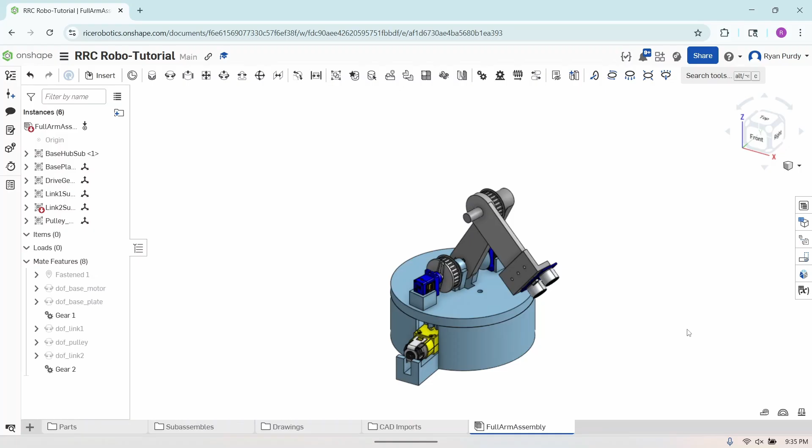In this video, we'll be taking our complete design, as shown here, making some minor adjustments so that it'll actually work better once you print out all the parts and you assemble it to actually build your robot. So, whenever we initially designed this arm, we were constrained by the torque that can be provided by this servo, right? Or not this servo, sorry, this servo over here.

So this servo has to put enough torque to support the weight of link 1, the weight of link 2, and the sensor at the end. So it turns out whenever I actually built this version of the arm, the links were too long and too heavy, and this servo can't handle it. So whenever it tries to lift the arm, it just falls back down.

And so we need to reduce the torque that we're requiring of this servo, and we're going to do that by making these links lighter and shorter. So we're going to start by making some small adjustments to both link 1 and link 2 to make the arm actually functional once you try to assemble it.

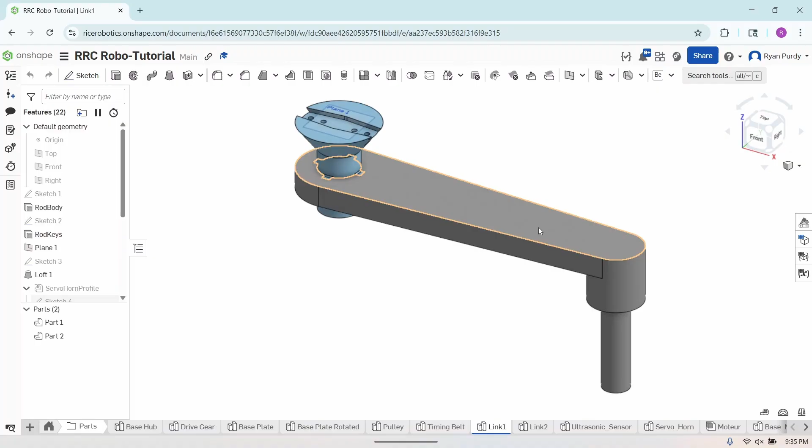So navigate to the link 1 part. And we need to open the sketch that's affiliated with the link 1 body. Hopefully you were naming your features and now we can find it easily. So we need to edit this sketch. Looks like this. So first thing we're going to do is make this shorter.

So we're going to change this dimension from 108.8 to 80. And then we're also going to change the diameter of this circle from 20 millimeters to 15 millimeters.

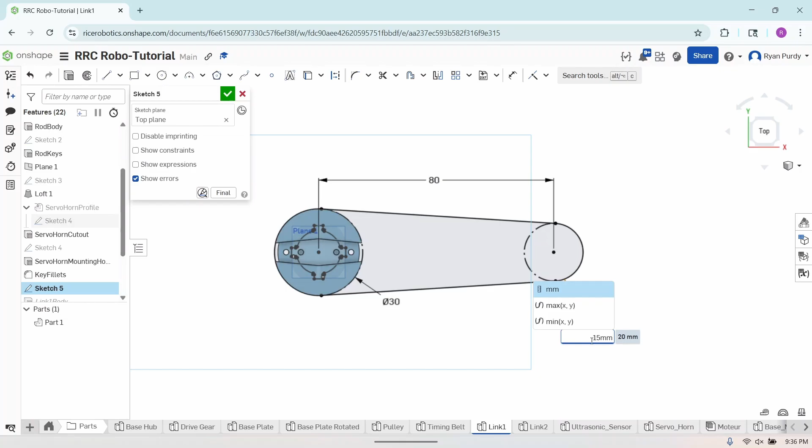So this already reduces both the weight and the length of this link quite a bit, but we can do even more by adding a cutout here, because this is a non-critical area, so we can just remove some material here and it'll further decrease that weight. So we're going to start by drawing a line here somewhere, okay?

Escape the line. Now we're going to use a relation to make this line parallel to this straight edge, okay? And then we're going to define a parallel distance between these two lines to be 6 millimeters. So we need a dimension of both lines. This distance is going to be 6 millimeters.

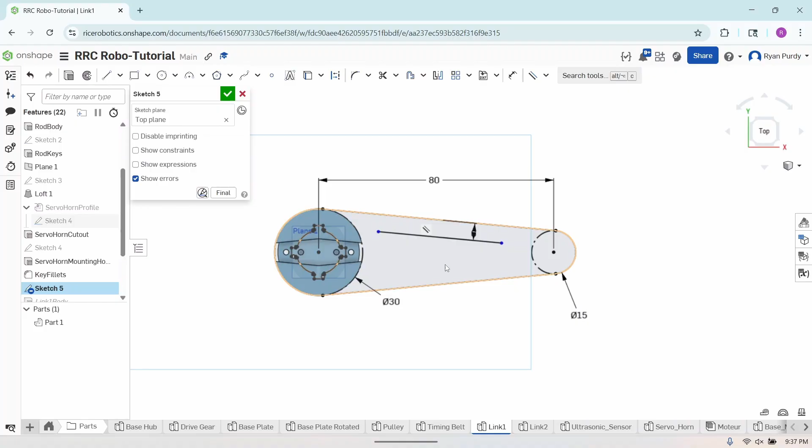Okay, now we want to mirror this onto the bottom half of the link. To do that, we need to find the plane that's dividing the link horizontally. It looks like it's the front plane. So choose the mirror tool. We're going to mirror about this line and mirror this diagonal line.

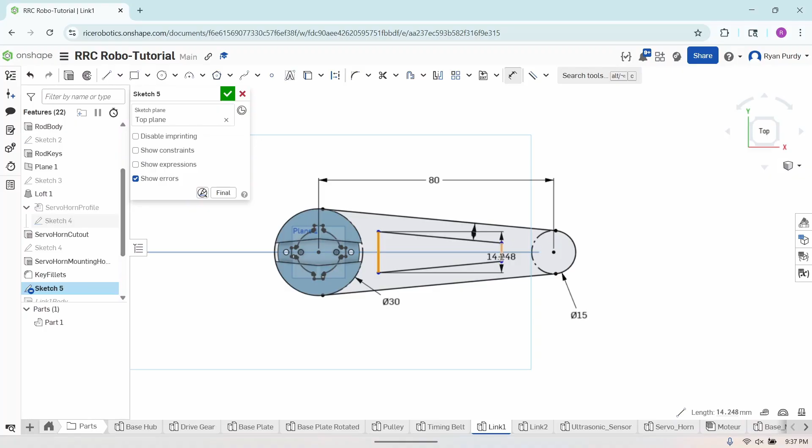Okay, and now I need to cap it at the ends. So we're going to add vertical lines that connect these two diagonal lines. Okay. Now we need 2 more dimensions to fully define this sketch. First, we're going to define a length for this cutout as 50 millimeters.

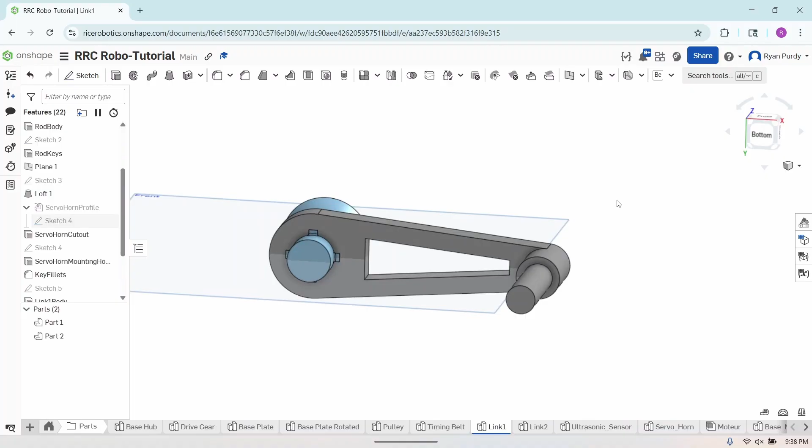And then we need a dimension to fully define its position. And that one is going to be an 18 millimeter dimension between this close edge and the origin here, okay? And with that dimension, the sketch is fully defined, and when we recalculate the model, we see that we have a shorter link that also has a cutout. This will significantly reduce the torque that we need from that servo.

So this is great. Bad news is it introduces a problem, right? So we've decreased the length of link 1. For one thing, it's probably going to mess up our assembly. Let's see if the assembly still works. Okay, the assembly is fine, but now that we've changed the length of link 1, the length of the belt that goes around these pulleys has also changed.

And that might not sound like a big deal, like, okay, let's just change the length of the belt. But remember that we changed the length of the belt by scaling down our current model. And if we scale down our current model, we have to scale these pulleys by the same factor. So this could be very annoying. So we need to find a way of fixing this issue that is not overly complicated.

So the way we're going to do it is we're going to use what's called a variable studio. And we're going to develop a method of automatically updating that belt and pulley size as we change the length of this link 1. Okay, so let me pull up a sketch that kind of demonstrates what I'm talking about.

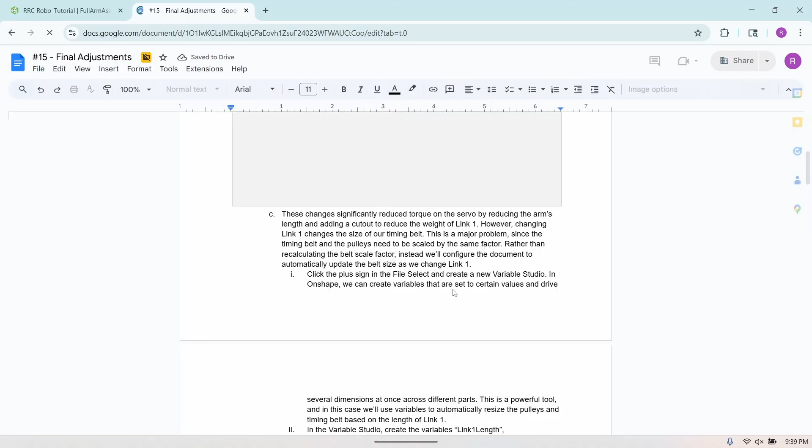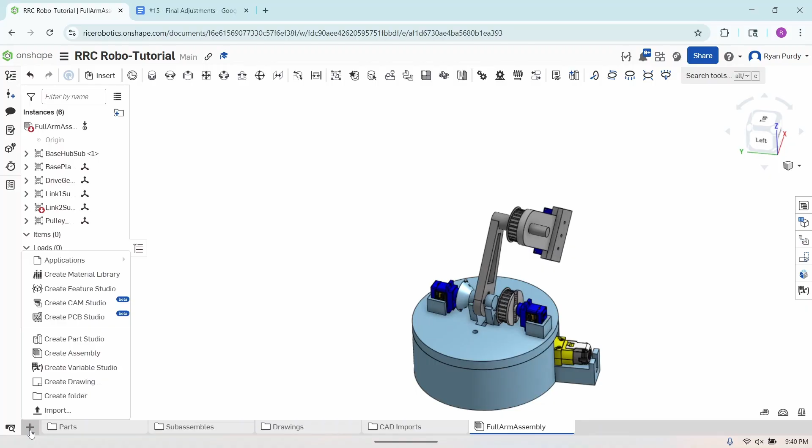So how do we actually implement this in Onshape? We're going to use what's called a variable studio. So outside of all of our folders, we're going to hit plus in the file select. We're going to create a variable studio. So in a variable studio, you can define any number of variables that you want, and we can use these variables inside of our parts to specify certain dimensions. So for example, you could use one variable to define 5 different lengths across all of your parts. If you change the variable in the variable studio, all 5 of those dimensions will update. So this is a very powerful tool, and we're going to use it in this case to automatically rescale our belts as we need to.

So to do this, we're going to define several different variables, 4 total. First, link 1 length, then starting belt length, starting pulley diameter, and then the scale factor that's going to be calculated from those other values. So these 3 will be the length values. The scale factor should be dimensionless, so we're just going to change it to any. Okay. Now link 1 length, we've defined it just now. It's 80 millimeters.

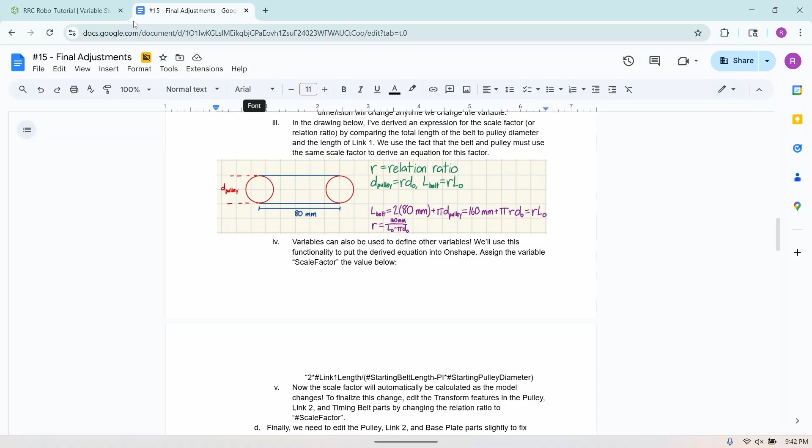Okay. And then from McMaster, when we imported the pulley and the timing belt files, we could get the initial length and the initial diameter for those. I just have those ready for you here. Initial length of the belt is 375 millimeters, and the initial diameter of the pulley is going to be 38.2 millimeters. Okay. Now we have all 3 of these quantities that we need. We're going to apply this formula and use that to calculate our scale factor. So you can use variables that you've already defined to define the value of other variables, which is pretty cool. So how it's going to work is 2 times, and whenever you're going to use a variable to define a dimension or define another variable, you always start with the hashtag, and then you type the variable name.

So we're going to do 2 times this link 1 length. So we're going to go 2 times hashtag link 1 length. And we're going to divide by the starting belt length minus pi, which I think you can get just with this. Yes, so it's already defined here, so just type pi in all caps, and it will work for you there, times hashtag starting pulley diameter. And now that should be our formula. Should have closed the parentheses, hit enter. Yes, this is the scale factor we need. So now we've calculated the appropriate scale factor, and now we just need to actually apply these variables to our models so that they automatically update as needed.

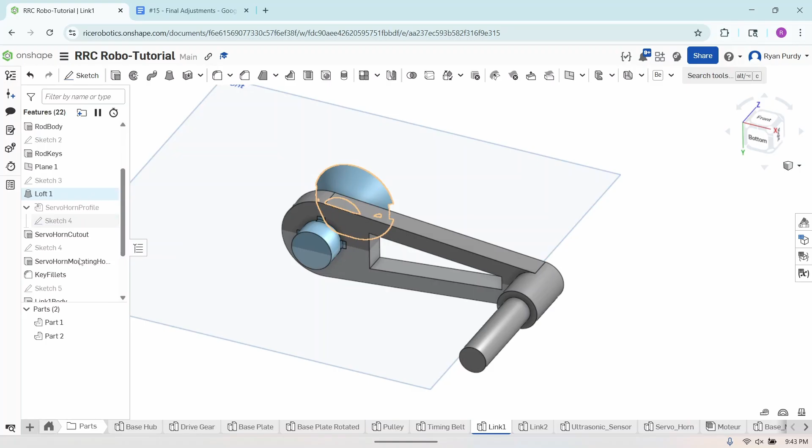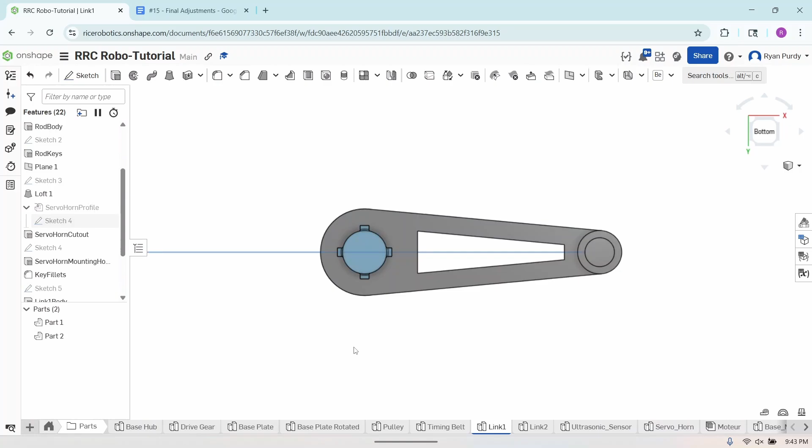So first, we're going to go to link 1. We're going to edit that link 1 body sketch. And this time, instead of typing this value, we want to reference a variable to define this dimension. So it's going to be hashtag link 1 length that we just defined. And it's still 80, but in this case, if we change that variable in the variable studio, it'll automatically update this model. Now we need to go to everywhere where we scale a pulley or a timing belt, okay?

So first in pulley, let's go to this transform feature and edit it. Instead of providing the scale factor directly, we're going to use a variable, hashtag scale factor. You'll see it gets smaller because we require a smaller pulley for our new design. You can see there's some issues with these holes. We'll be back to fix that in just a second. The timing belts, we're going to do the exact same thing with the transform feature here.

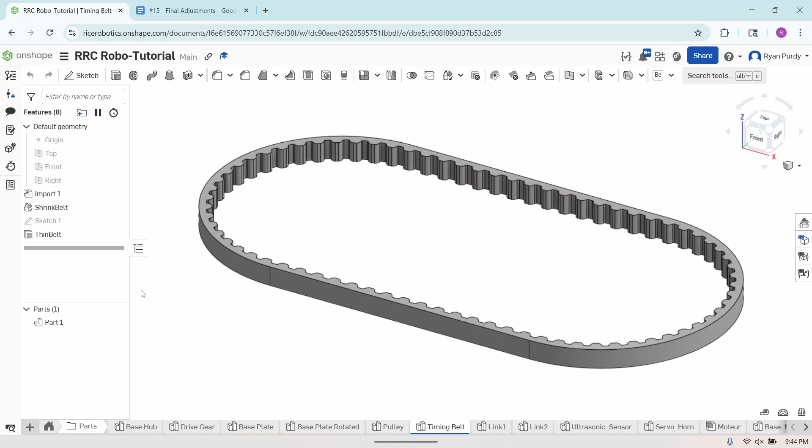Okay. Belt also shrinks. And then remember, we also have a pulley as part of link 2, so we need to make sure to update that as well. We're going to edit, transform feature, hashtag scale factor, and that one shrinks as well. And this also introduces some issues with the holes. We'll be back to fix that in just a second.

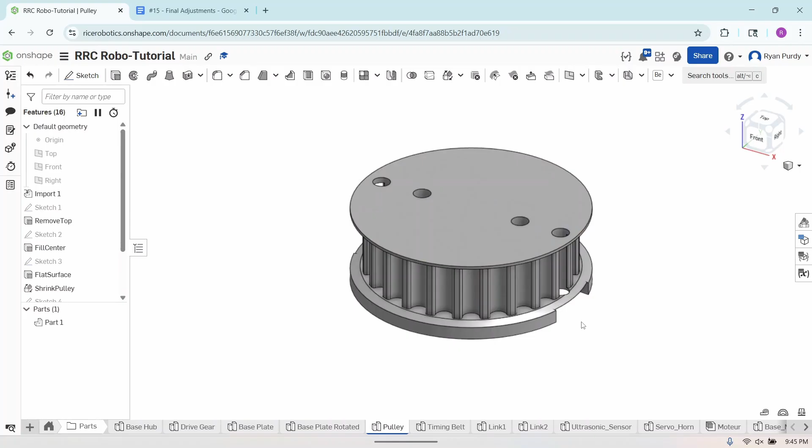So we'll start with the pulley and make some fixes for this. One thing is these holes, instead of cutting into the main body of the pulley, now they cut through the teeth, and that causes some issues. And so we need to change the distance of these holes from the center. So we're going to edit. It's the sketch affiliated with the servo horn mounting holes.

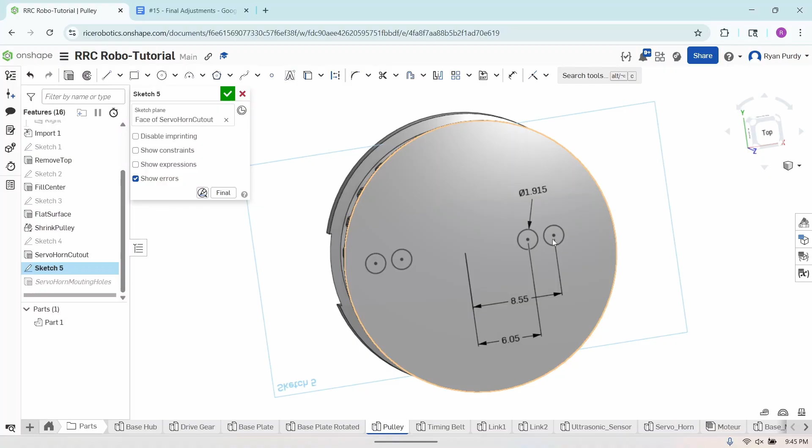Okay, we're gonna edit. And now we want to basically divide the distance separating these two holes by 2. Which is just going to mean we're going to reduce this dimension by 2.5 millimeters. The math on that holds up. There's 5 millimeters between these two dimensions, so we're just going to subtract 2.5. That gives us 8.55 millimeters. And now they're much closer to each other, and they will no longer cut into the teeth of the pulley, which is good.

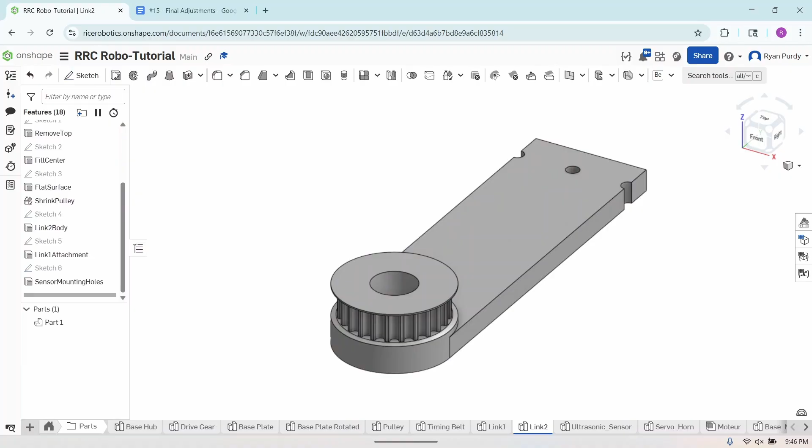Okay. Another issue we're going to run into is with link 2. These holes are now just in the side of this part, and that's not going to be useful for mounting the sensor holder or the sensor mount. So to do that, we're going to edit the sketch affiliated with the sensor mounting holes. It's probably the last feature in your part. And we're going to change this separation from 13 millimeters to 9 millimeters. Okay. That will make sure all those holes are actually going through the body.

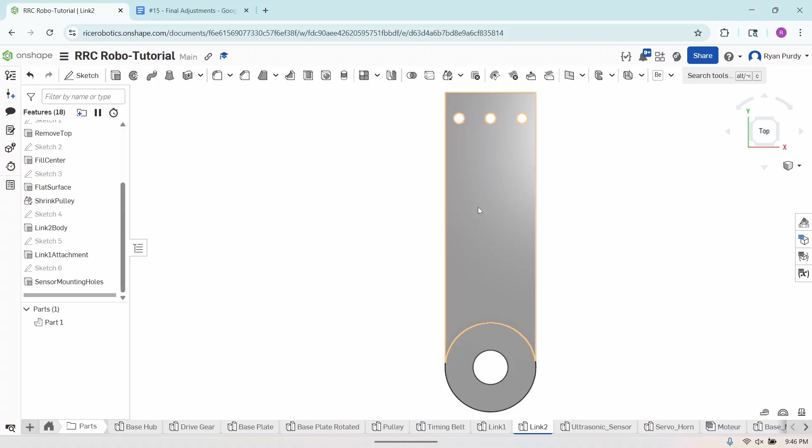And now this can also be made much shorter because this diameter has been decreased. It'll also just reduce the torque needed by that first servo, which is a win. So we're going to go edit link 2 body. We're going to change this length from 80 millimeters to 50 millimeters. Okay. And now it's much lighter and reduces the torque it's putting on that servo. Cool. We have a few more things to fix here.

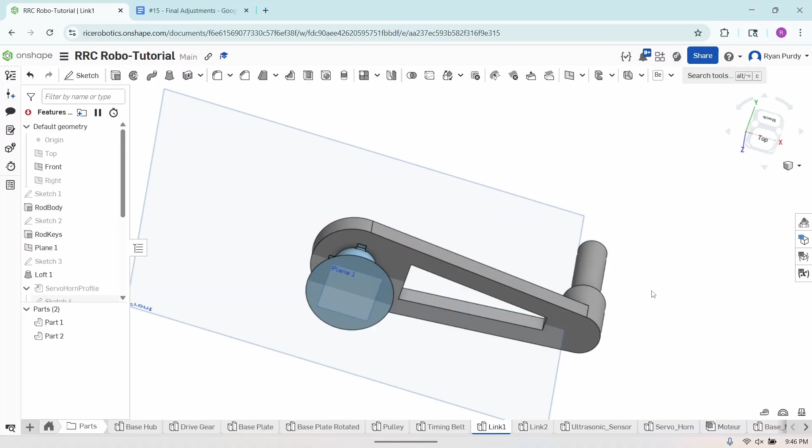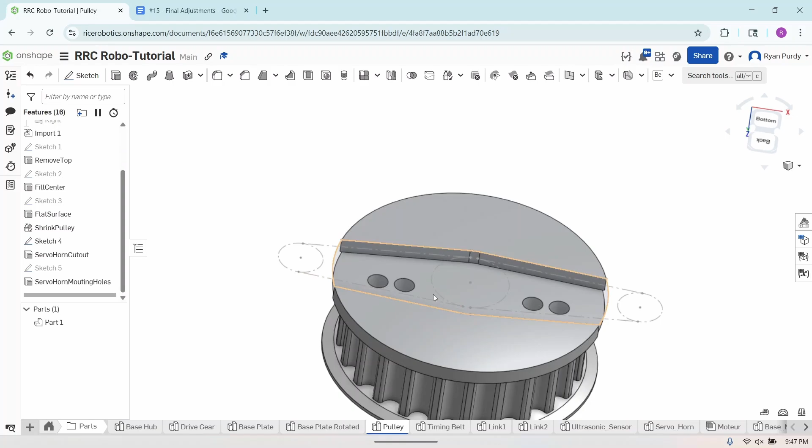Link 1 has an issue. If you look at the top, this cutout is no longer here, which introduces errors in this feature as well, where you have the servo horn mounting holes. The reason for that is, remember, we used a derived feature to pull the sketch that defines the servo horn profile from the pulley. I'll remind you what that looks like. Should be here, this sketch. We pulled this sketch and added it to link 1 using a derived feature.

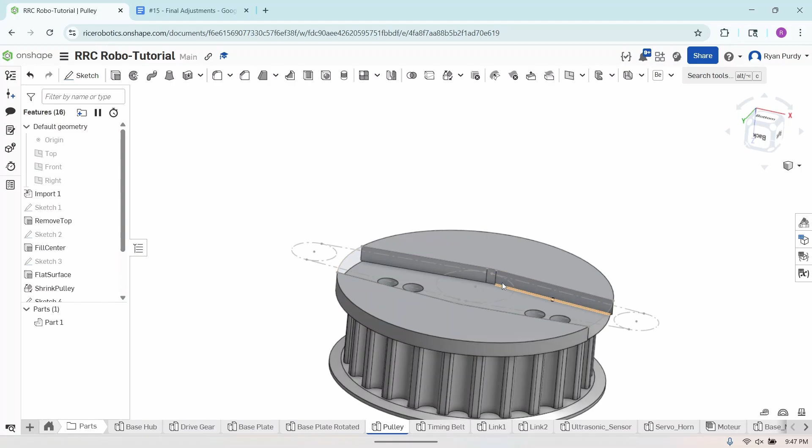But now that we've changed the size of the pulley, we go look at this cutout. You can see it's still extruding, but it's not intersecting the model, and that's because basically the sketch has changed its position relative to the origin. So it's a little bit complicated, but basically we need to update the position of that derived feature so that we actually get this cutout like we want.

So just like we did before, if you remember, we need the distance from the sketch plane to the origin, and that tells us how much to shift our derived feature by. So select this face. We need to show the origin and select it. Go to the measure tool, and we just want the distance in the Z direction. In this case, it's 7.6 millimeters.

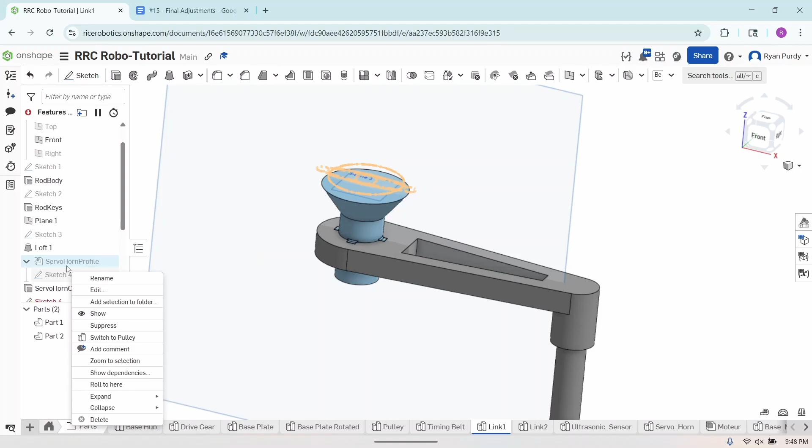So we're going to edit link 1. We're going to exit this feature, edit the derived feature. And remember, we defined the position of this sketch by editing this mate connector. So here we're going to change this offset distance from 10.332 to 7.6 millimeters, that value we just measured. And now if we accept all these details, we see the cutout is once again in the rod.

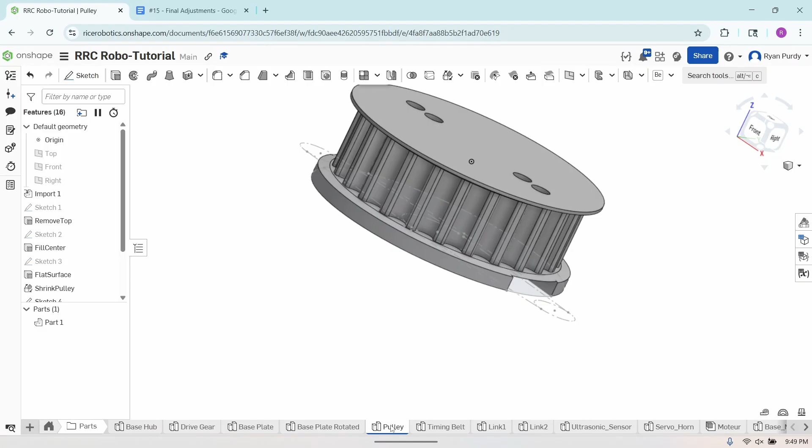However, you can see this no longer goes to the edge. This is because the pulley and the end of this rod used to be either the same diameter or the pulley used to be larger, but now that the pulley has become smaller, this cutout doesn't go all the way across the rod. And so to do this, we need to go edit the sketch in the pulley, and we need to make it larger, basically, make it extend further out from the pulley. So we can do this pretty easily. I'll hide this again, but then we'll edit it.

Okay, so basically we need to make this circle on the outside larger. Right now it's just defined to match the diameter of the pulley, but we need to change that. So start by selecting all of the arcs that make up this circle and deleting them, okay? And then all of these points where these lines intersect the circle, we need to remove the relation that holds that point there, which is this coincident relation.

So for all of these points, click the point, click the coincident relation and delete it. That all the way around. This makes our sketch underdefined again, which means we can shift it outward like we're wanting to do. Okay, select the coincident relation.

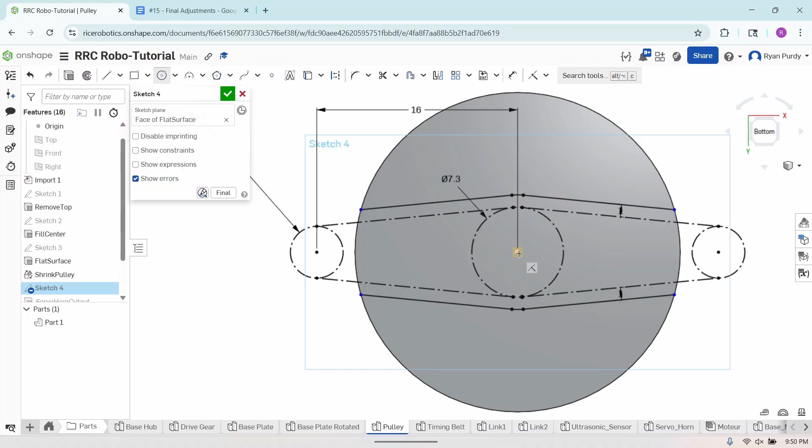Okay, now we need a new circle of the correct size to tie this sketch to. So to do this, let's see what the diameter of this rod is. It's 30 millimeters. We go back to the pulley sketch. We're going to draw a 30 millimeter circle out here. Use a dimension to specify a diameter of 30 millimeters.

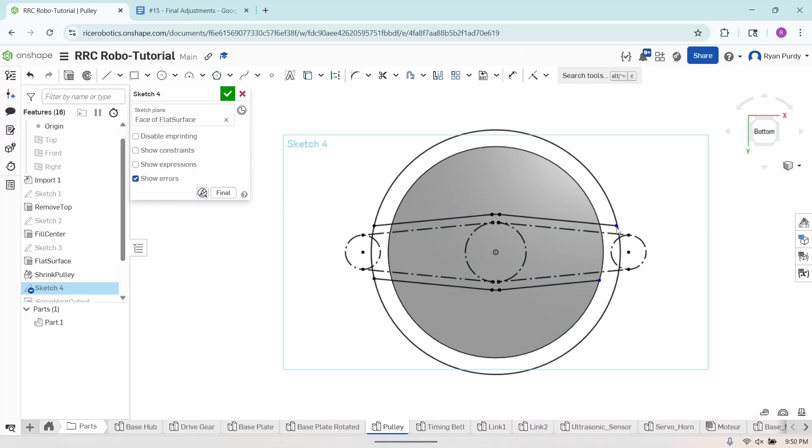And now we're just going to drag all these lines like we've done before to the circumference of this circle, and it will fully define the sketch. Very similar to what we've done before, but now we're just making it a little bit larger so that it still works with our link 1 design.

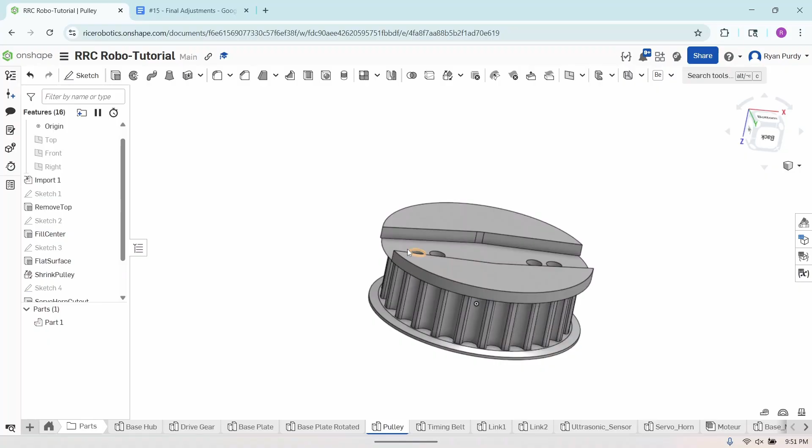Final thing is we want to eliminate these larger arcs because they don't actually contribute to our profile. Before, we converted those to construction geometry; this time we're just going to trim them because it's easier, and in this case it doesn't change our result. Finalize this sketch. And now this feature looks exactly the same, right? It didn't change anything because all of the additional area we're cutting is just empty space for the pulley.

However, if we look at link 1, we now see that the cutout spreads out all the way across the rod just like it did before. So this is good. This means we've fixed the cutout. Now let's see if we need to update at least one other part. Whenever you start making changes to your CAD that you didn't intend on making, oftentimes you'll realize it had unintended consequences in other parts, and you have to go fix all of those things. It's just what we have to do.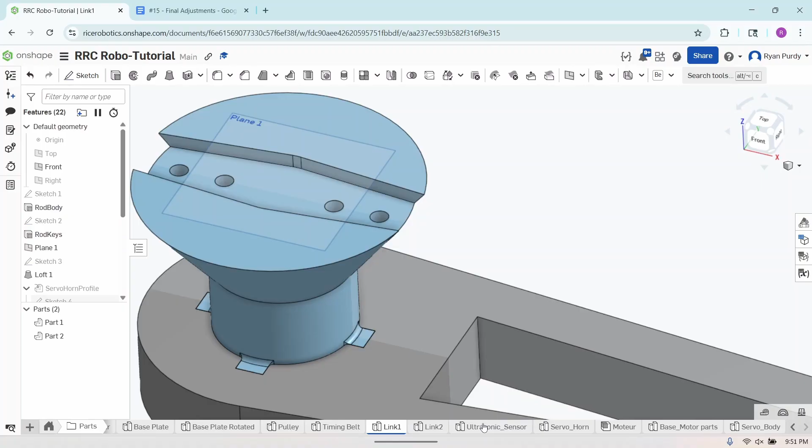In this case, the final thing we need to do is update the holes in the ultrasonic sensor mount. The reason for that is if we look at this assembly, the holes will no longer line up because we moved the holes in link 2. The middle hole still lines up because it's centered, but these other ones do not. So we need to shift the circles on the sensor mount to make everything line up again.

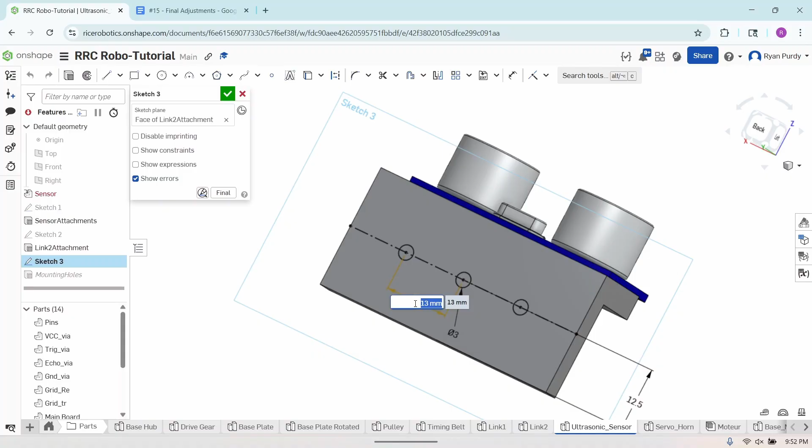So we're going to go into the sensor CAD. You can right click this feature and it'll show both the feature that you can edit and the sketch. So we're just going to edit the sketch. And remember, we changed this separation distance from 13 millimeters to 9 millimeters. Okay. And now holes are much closer together. If we go back to the assembly, these holes should now line up once it updates; it takes a moment. There it is. And now the holes are aligned again.

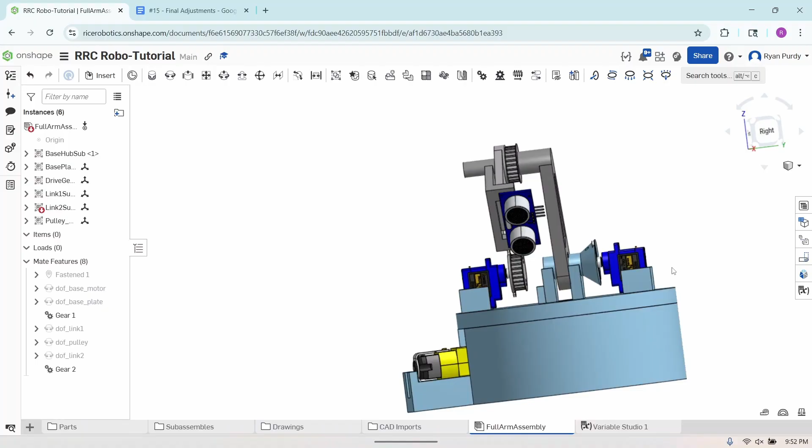So, great. Let's make sure our assembly isn't broken in any way. Oftentimes when you change parts that make up assemblies, things can break, and you might have to go hunt down those problems and make sure all the mates and everything are working correctly. But in this case, the assembly looks good. So now we've created a much lighter and shorter version of our arm that is still functional, and it should, at least in my testing, operate much better with the limited torque provided by this servo. So we're good.

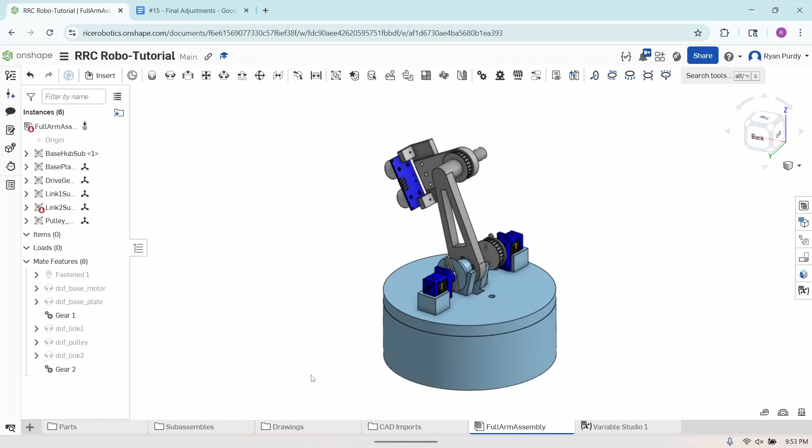So those are the major design alterations we need to make sure this is a viable design. However, there's another component: you need to make sure that you prepare your parts for 3D printing. The biggest problem that you're going to face whenever 3D printing CAD models that you've designed is the size of the holes, okay? We've designed all of these parts with holes that are the exact size we want for various bolts and to fit other components within them. But whenever you actually 3D print these things, all of those holes are going to be slightly smaller than how you defined them in CAD.

And that's just because 3D printing is only so accurate and it has this tendency to print these holes smaller than what we designed in CAD. Just super annoying, but we need to accommodate for that somehow. So we have to go around, look at all of the holes and make them slightly bigger so that whenever we print them, they'll be approximately the size that we intended when we first designed the arm. So this can be a tedious process, but it's something we have to deal with if we're going to be 3D printing our parts. So I'll show you some of the common approaches to dealing with this problem.

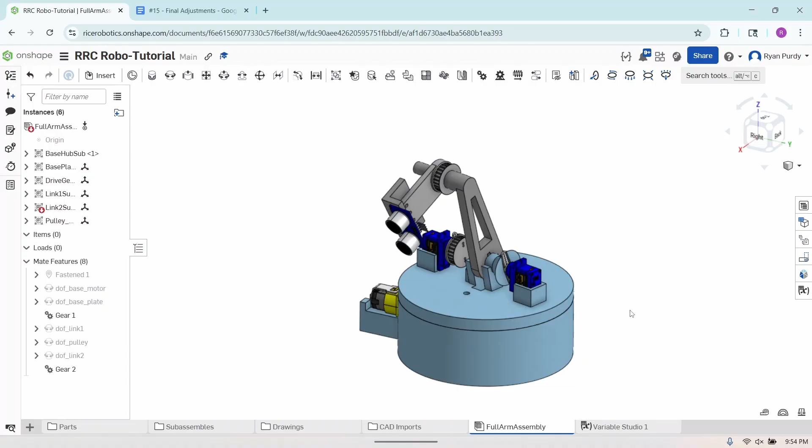So first, maybe we should run through the parts and see what all needs tolerances, okay? So these holes are going to require tolerances because they have bolts, and those are the bolts that hold the base motor in place. These holes are just for wire management, so they don't need to be too precise. So you won't need tolerancing on them.

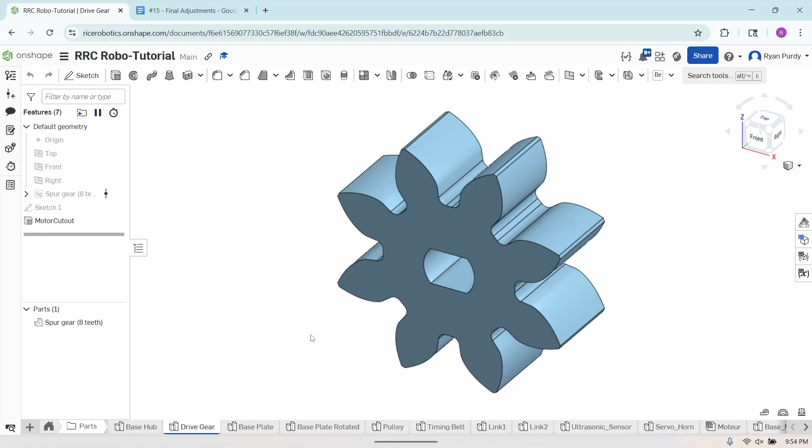The drive gear, this part here, will need tolerancing because right now, well, actually, I'm not sure if it is. Oh, no, it is. It's the exact right size to fit that motor shaft, but if we print it, then it's going to be slightly too small and it won't fit. So you need to do a small offset. You need to make this a little bit bigger. So I can show you how that would be done. I don't know exactly what offset would be appropriate, but I think I remember what I did in my design.

So we have this, but we need to create a version of it that's slightly bigger so that it will print successfully. So the way I would approach this is select all of these edges, convert them to construction, and then do an offset. Okay, oh, that's a mirror. Do an offset of these entities. Make sure it's going outward. It's going to be maybe like a 0.2 millimeter offset.

What does that look like? That looks reasonable. These tolerances aren't going to be huge. It's just going to be a small adjustment so that you can be confident that the holes will be the right size when you print them. Okay, so this offset looks okay.

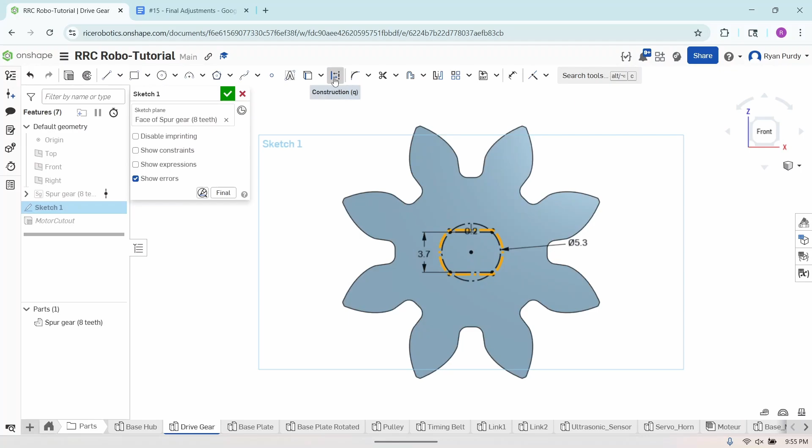Now we need to convert the ones that we actually want to define the geometry, which are the offset version, and change them from construction back to normal geometry. Hit the check mark. And now this hole is very slightly bigger. You might not be able to notice, but now we can have much more confidence that it will fit the motor shaft whenever we actually print out the part. Okay? So that's basically the approach you're going to take with all of these holes.

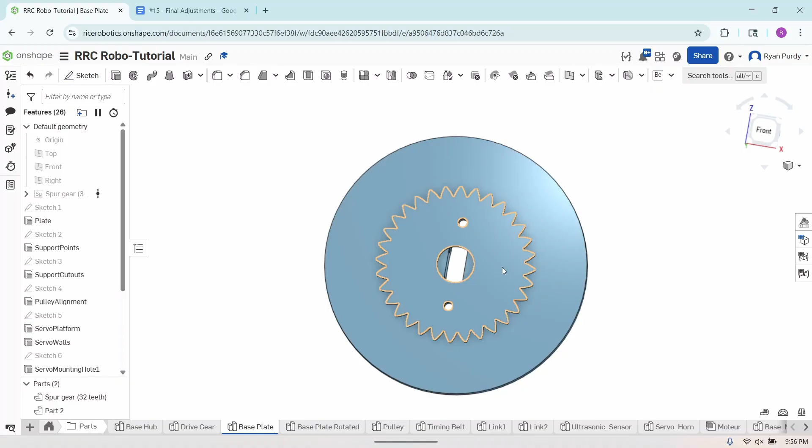Okay, so let's take a look at the base plate. These holes, you may need to make them slightly bigger, but as long as the holes in the gear and the holes in the base plate are the same size, you're probably doing well. Same with these holes here that are used to mount the servo to the base plate. Oh, they have a whole other issue that I'll return to in a second to show you how to deal with that. We'll look at the pulley.

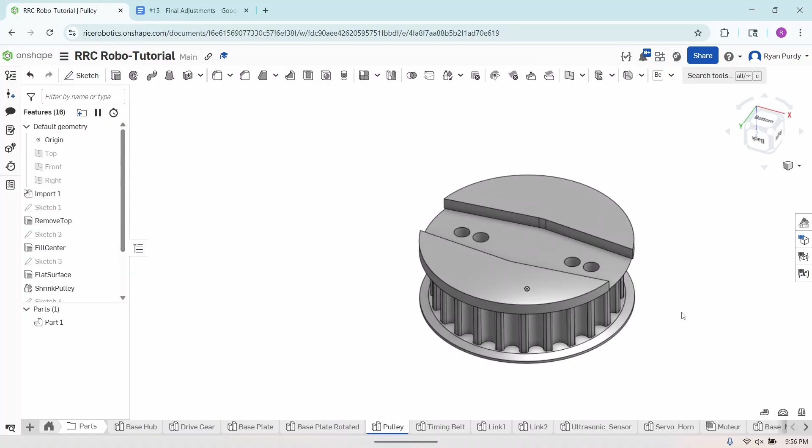These are going to require an offset. This link cutout is already offset enough so that it won't require any adjustment. So that's nice, but these will need to be offset. The timing belt is fine. Link 1. So this cutout in link 1 is going to require an offset because there's a tendency for the holes to be too small when you 3D print.

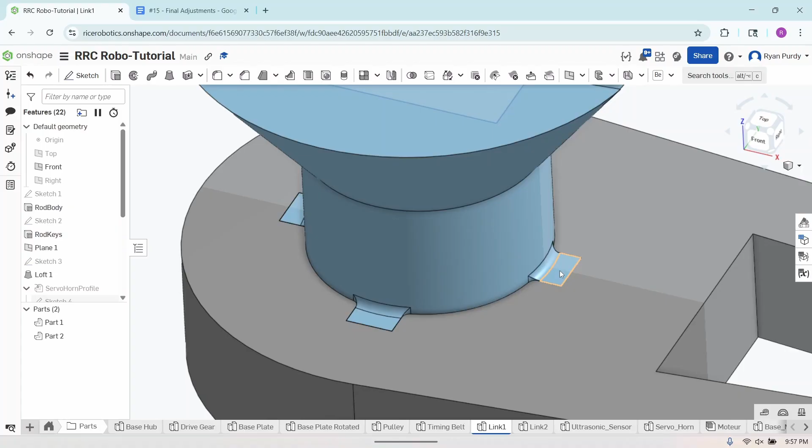And also this part, whenever we print it, the rod itself is probably going to be slightly larger than we designed in CAD, just due to inaccuracies of printing. So we need to make sure there's enough of an offset. I'll hide the rod here. Enough of an offset in this cutout so that we can have confidence that it'll be somewhat accurate whenever we 3D print it. So that would follow a very similar approach to what I did with the drive gear.

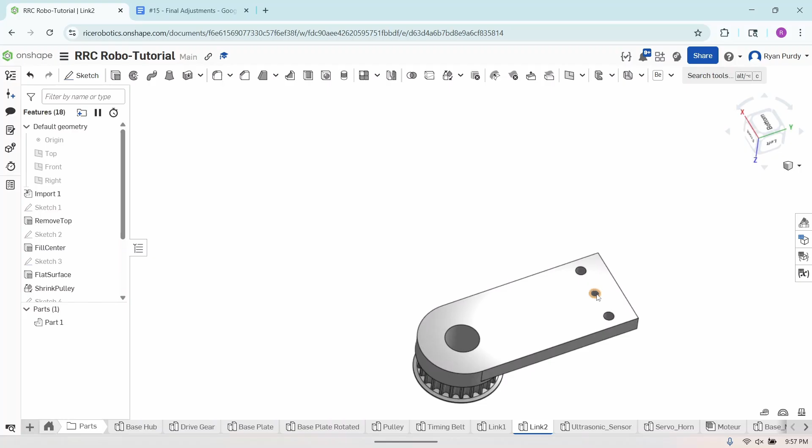And I can't really walk through and do all these things because there's a lot of them to do, and the amount of tolerance you need is going to change a lot between different printers and different sets of printer settings. So you really need to do this testing for yourself to figure out what the size of different holes need to be. So this hole is where this part of link 1 passes through.

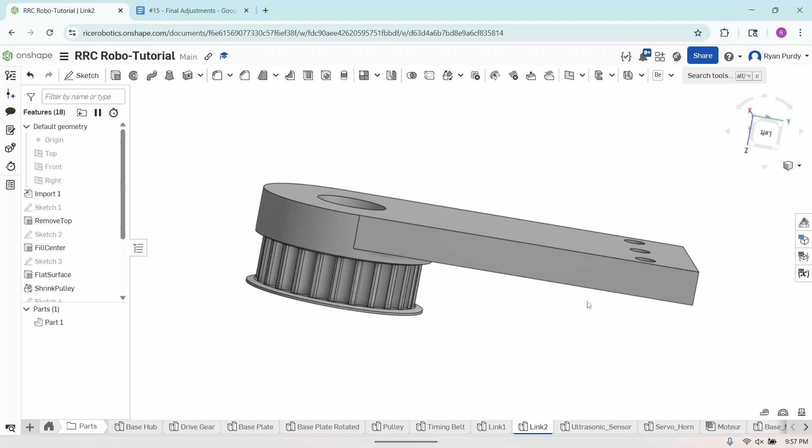So you can leave this part of link 1 the same size, but you will need to make this hole a little bit bigger to make sure that it will fit that part of link 1. These holes you can also adjust, but I don't think we've really designed these for any specific bolts. So first, I would go to the OEDK, go to the bolt cabinets, figure out what bolts are readily available and you can use, and then design these holes to be slightly larger than the diameter of those bolts.

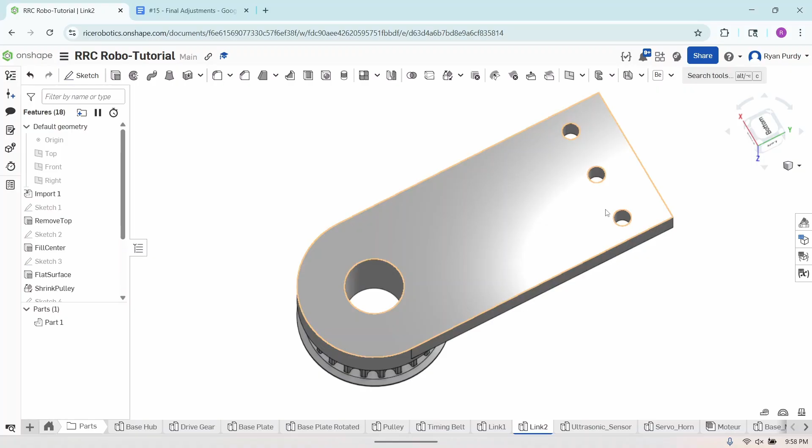Okay. I don't want to recommend to everyone that's doing this tutorial to use the exact same bolt size, because then they'll never be available. Go to the OEDK, find one that's reasonable and very available, and design around that. Okay. And pretty much the same here. You'll need another offset for these, just like these, just to make sure that the bolt that you select is going to pass through both.

So there's a lot to be done here, a lot of holes to experiment with. So there's going to be a benefit, whenever you're choosing what bolts you want to use, to choose as few types as possible. Okay. So you may want to try and use the same bolts to, for example, attach the sensor mount to link 2 as you use to attach the base motor to the base hub here. That way you have to do less testing.

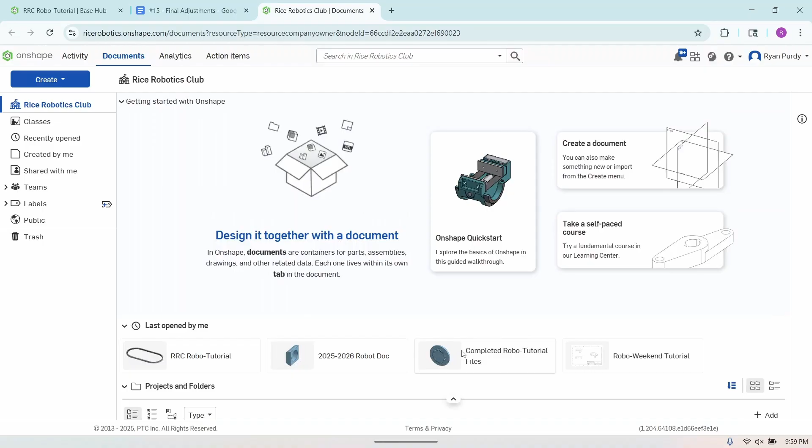How do you actually conduct that testing? You do it by using a hole test piece, I would call it. It's basically a little piece that you'll 3D print that has holes of a bunch of different sizes, and then you can test all of those different hole sizes and see which one is the best for your bolt. So I'll show you an example that I made the other day.

So design a piece like this, a small extruded piece with a couple different hole sizes in it, print it, and this is a very small piece, so it should only take a few minutes to print. Test and figure out which hole size is the best for this specific bolt. Update all of the CAD models. For example, if you're doing this for the bolts that will hold the motor into the base hub, then you should run a hole test for whatever kind of bolts you're going to use for that application. Figure out the exact diameter that works best for your design, and then update these holes before you print.

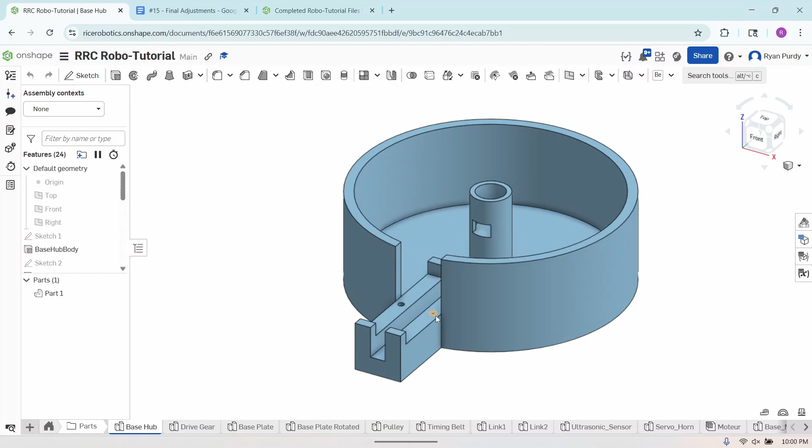And then once you've decided that, if possible, print on the same printer just to minimize any randomness or inaccuracy that could lead to your design not working. Or the bare minimum you should do is make sure that you're using the same print settings. Same printer is ideal because I'm not even aware of all the factors that influence the printing accuracy. But just try and keep the conditions exactly the same whenever you print your next version so that those holes are as accurate as possible.

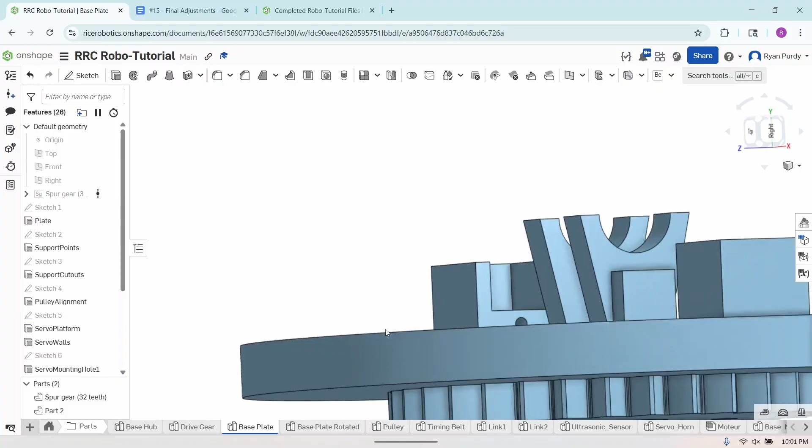Okay, so my suggestion for how to hone those hole sizes quickly is to print a few of these test pieces. It doesn't take very long, and it's a quick way to figure out a pretty precise diameter for your various hole sizes. But there's another problem with holes, unfortunately, when 3D printing, which is vertical holes. So most of the holes in this design are horizontal, which means the 3D printer is going to print in this orientation. So it's going to print a bunch of very thin layers on top of each other, and it's going to print this hole, I guess all at once would be a good way to say it.

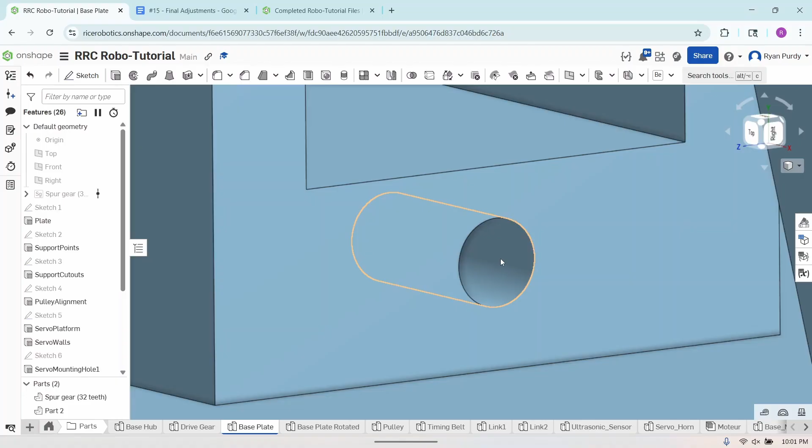You're not building up this hole over time, but if you look at a vertical hole like this one, you're going to be printing layers and building up over time. And what that leads to, let me find a picture of this, is whenever you reach the top of the hole, it's just going to cut it off. It's going to flatten it out, and your bolt won't fit through if you don't make some adjustment. So to fix this, either you can just drill out the hole, like it'll almost be the entire hole once the print is complete.

So you can just run a properly sized drill bit through it, and it'll open up that hole. Or if your hole is very small and we don't have a drill bit that's small enough for it, or if it's hard to access that hole with a drill, you can use some other geometry that allows for some flexibility in the size of that hole.

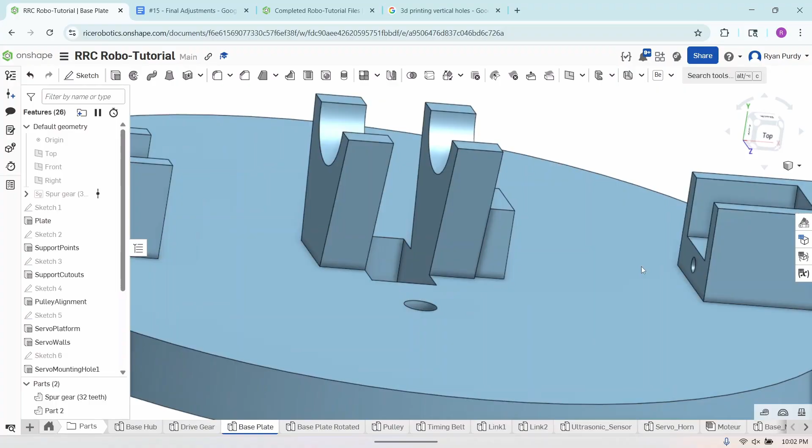Like I said, there aren't many vertical holes in this design, but both of these holes, this hole and the one on this side, have this issue. So we can edit this. I can show you how to add that teardrop geometry. So I'm just going to edit the first servo mounting hole. Normal. This works. So basically what you need to do is you need to add a line.

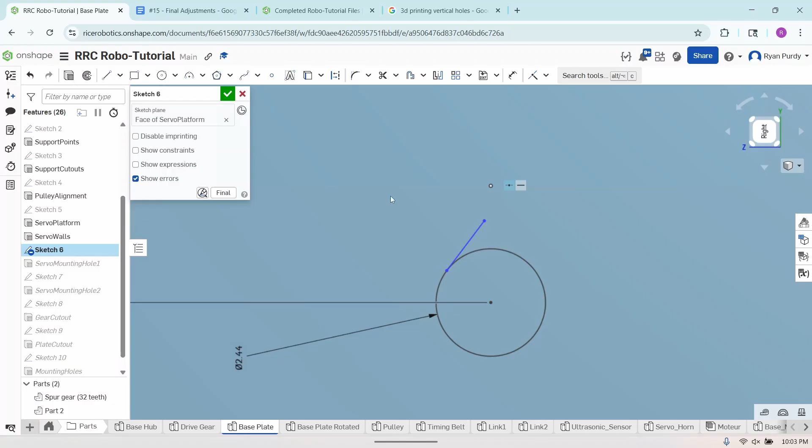It's going to be coincident and tangent to the circle. And then it needs to be vertically aligned with the origin. I believe that's the origin. No, it's not. The origin's down here. It needs to be vertically aligned with the origin. Okay.

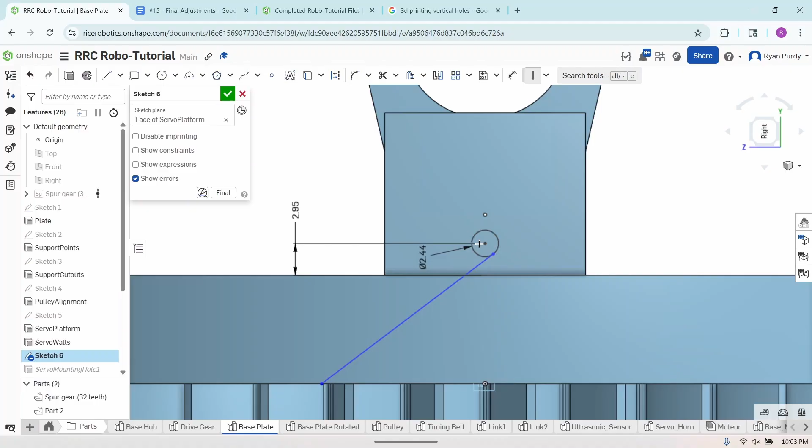So go to the relation menu, select vertical. Make this point vertical to, I selected the wrong point, let's see. Vertical to, that's annoying. Origin, okay. That's not, oh, we're reoriented. So vertical is actually in the Z direction, so we have to make it horizontal, which is very confusing. That happens sometimes. Horizontal to the origin.

And then we just need to define the vertical distance from the center of this hole to the top of this teardrop shape. So to do that, let's see what I put in the tutorial. A vertical distance of 1.4 millimeters. This is pretty flexible. It's not too precise what you do up here, just as long as it's a reasonable gap up here so that you definitely get this whole area.

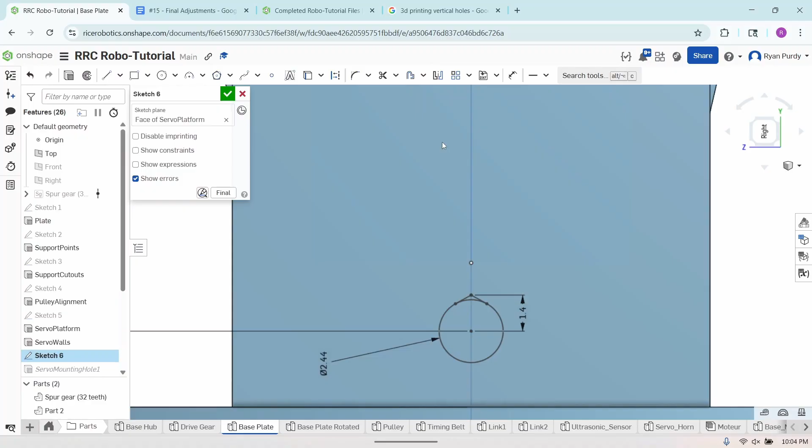It's all good. And then we need to mirror this line about the plane that divides this vertically, which is here. So we're going to mirror about this line, like this. And then the last thing we need to do is trim away this extra piece of the arc so that our teardrop profile is complete. So I'm just going to select the trim tool and drag over this section of the arc, and now the teardrop is complete.

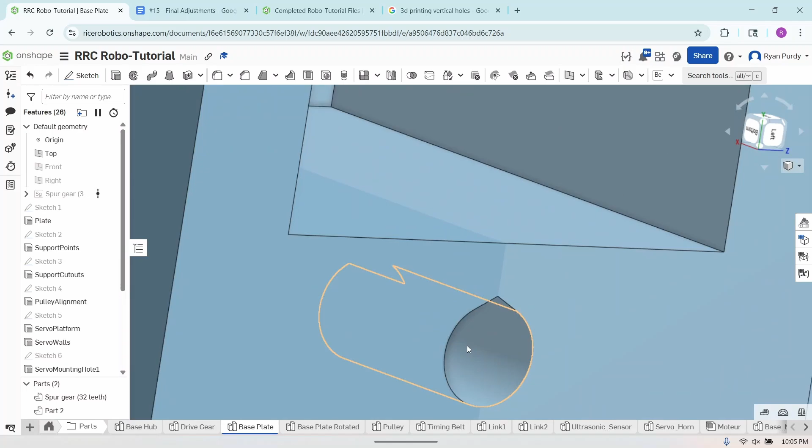So if we finalize that sketch, can't see it from this angle. Coming up front, we now have a teardrop shaped hole that will help to have better quality on some of these vertically printed holes. So just keep that in mind as well. This is something you might have to deal with because if we don't add this additional geometry up here, it may just print round all the way up here and then suddenly flatten out at the top, which can introduce some issues.

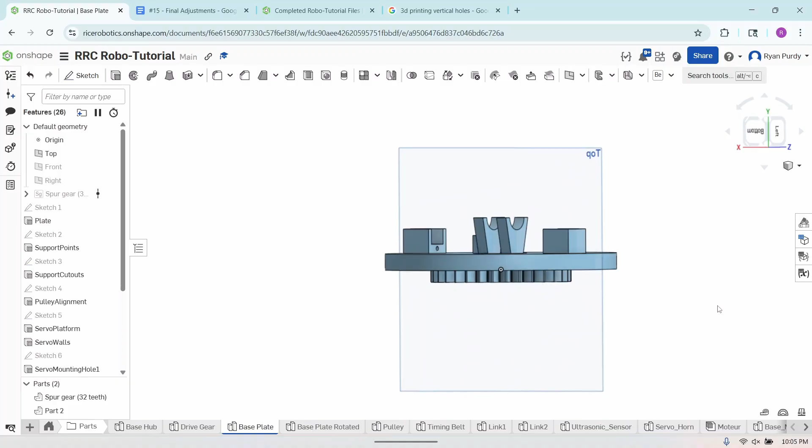You should probably do it for this hole as well, but I've already shown you the method, so just make sure to apply it to that hole as well, and then we'll be good to go. So this whole process of tolerancing can be really annoying. There are certain workarounds, like oftentimes the hole size needed for these bolts can be pretty flexible. You can usually find a bolt that works for your application.

Also, a lot of the time, like I said, if the hole is a little bit too small, you can use a drill bit of similar size to make it just slightly larger and make your design work. Just know that it's going to be an iterative process. You're going to have to try and probably fail a few times before you get a design that totally works together.

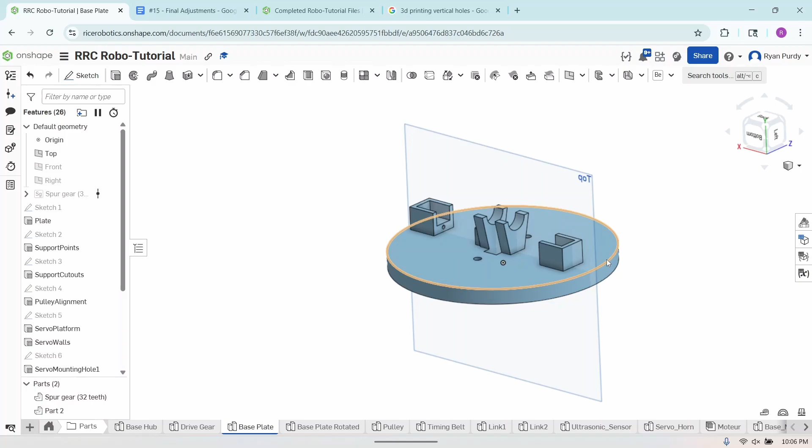Just persevere, and if you're having a lot of trouble, reach out to some other robotics members, or you can reach out to me through the Slack, or if you see me around the ODEC, that's fine. This is kind of a fact of 3D printing that you have to do some iteration to get the design to be totally cohesive. So I hope that you'll push through the struggle of tolerancing, and you'll get your design working.